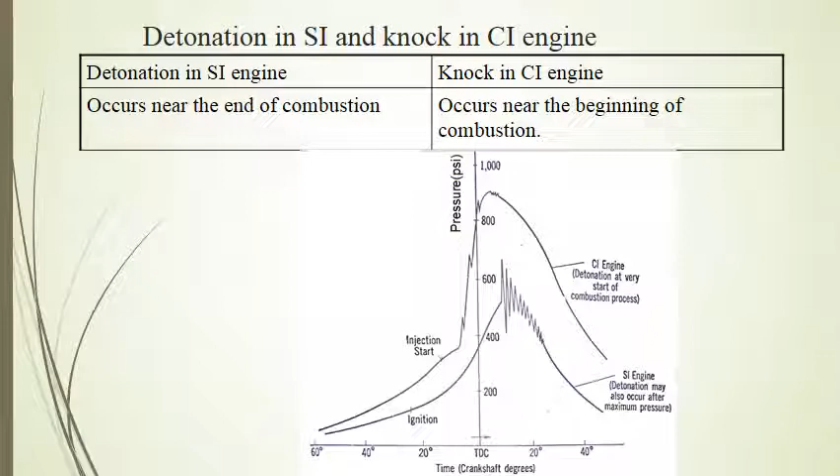So as shown in the figure shown on the slide, in the case of CI engine, detonation is occurring at the very start of the combustion process, whereas in the case of SI engine, detonation is occurring after maximum pressure.

The detonation in SI engine is of homogeneous charge, causing very high rate of pressure rise and very high maximum pressure. In the CI engine, the fuel and air are imperfectly mixed, and hence the rate of pressure rise is normally lower than that in the detonating part of the charge in the SI engine.

Moreover, as in the CI engine, the fuel is injected into the cylinder only at the end of compression stroke. There is no question of pre-ignition or premature ignition as in the SI engine.

In the SI engine, it is relatively easy to distinguish between knocking and non-knocking operation, as the human ear easily finds the distinction.

However, in the case of CI engine, the normal ignition is itself by auto ignition, and hence most CI engines have a sufficiently high rate of pressure rise per degree of crank angle to cause audible noise. When such noise becomes excessive or there is excessive vibration in the engine structure, then the engine is said to have knock.

Therefore, in the CI engine, there is no definite distinction between normal and knocking combustion. The maximum rate of pressure rise in the CI engine may reach as high as 10 bar per crank degree angle.

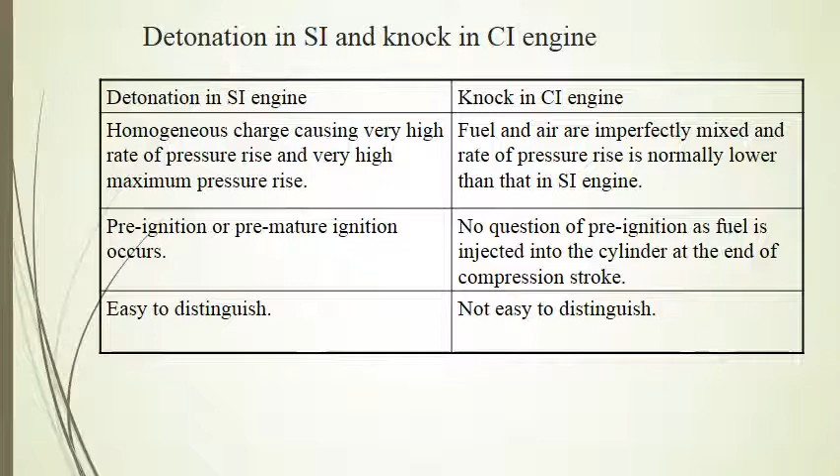Now we will compare the requirement of certain factors which tend to reduce detonation or knocking in SI and CI engine. Self-ignition temperature of the fuel required is high in the case of SI engine, whereas in the case of CI engine, self-ignition temperature required for the fuel is low.

Time lag or delay period for fuel, means ignition lag, that is required in SI engine is high, whereas the delay period in the case of CI engine, it should be short. The compression ratio should be low for SI engine, whereas it should be high for CI engine.

Inlet temperature should be low for SI engine, whereas high for CI engine. Inlet pressure should be low for SI engine, whereas high for CI engine. Combustion chamber wall temperature should be low for SI engine, whereas high for CI engine.

Speed desired for SI engine to reduce knocking should be high in SI engine, whereas low in case of CI engine. Cylinder size required to reduce detonation or knocking in SI engine is lower, whereas the cylinder size should be large for the CI engine.

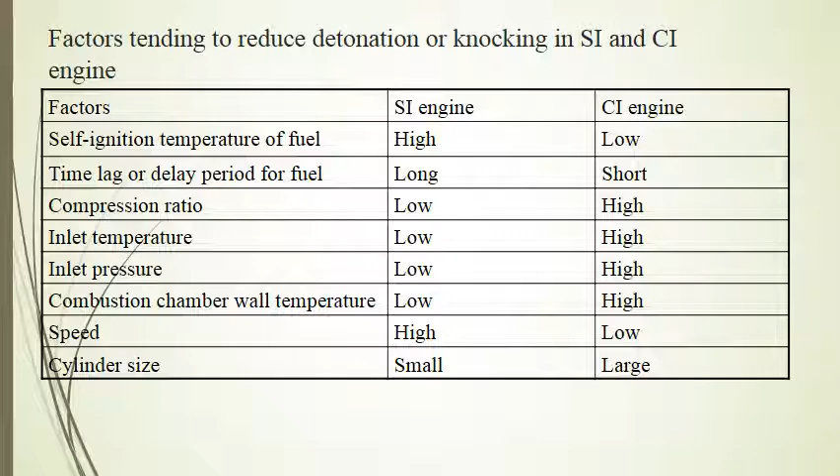Now, as far as the aspect of controlling or reducing detonation or knock is concerned, the approach adopted in the case of CI engine is just opposite to that of SI engine. The factors that tend to reduce detonation in the SI engine increase knocking in the CI engine.

The detonation or knocking in the SI engine is due to simultaneous auto-ignition of the last part of the charge. And to eliminate detonation in the SI engine, we want to prevent altogether the auto-ignition of the last part of the charge, and therefore we require a long delay period as well as high self-ignition temperature of the fuel.

Whereas if we want to eliminate knock in the CI engine, we would have to achieve auto-ignition as early as possible. So what is required? We require a short delay period and low self-ignition temperature of the fuel.

So we can say that a good CI engine fuel is a bad SI engine fuel, and a good SI engine fuel is a bad CI engine fuel.

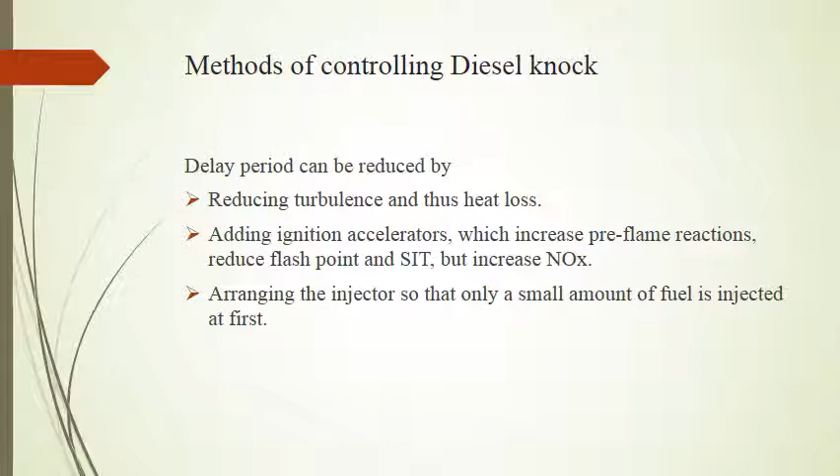As we know, in the case of SI engine, the fuel and air are mixed outside the combustion chamber, that is in the carburetor, whereas in the CI engine the mixing of fuel and air has to take place inside the combustion chamber.

This happens when the fuel is injected near the end of compression stroke during a period of say 20 to 35 degrees of the crank angle.

So we can say that the important function of CI engine combustion chamber is to provide proper mixing of fuel and air in a short time.

So what is required? An organized air movement, which we call air swirl, and this air swirl is provided to produce high relative velocity between the fuel droplets and air.

The fuel is injected into the combustion chamber by an injector having a single or multiple orifices. If a single orifice injector is used at the maximum delivery, the air movement should be so adjusted that the whole of the air in the combustion space is swept once past the fuel jet during the process of combustion.

So this involves a very high rate of air swirl. If two jets of fuel at 180 degrees apart are used, then air needs to make only half a revolution during the combustion process, and for four jets, 1/4 revolution, and so on. Thus increasing the number of jets reduces the intensity of air swirl needed.

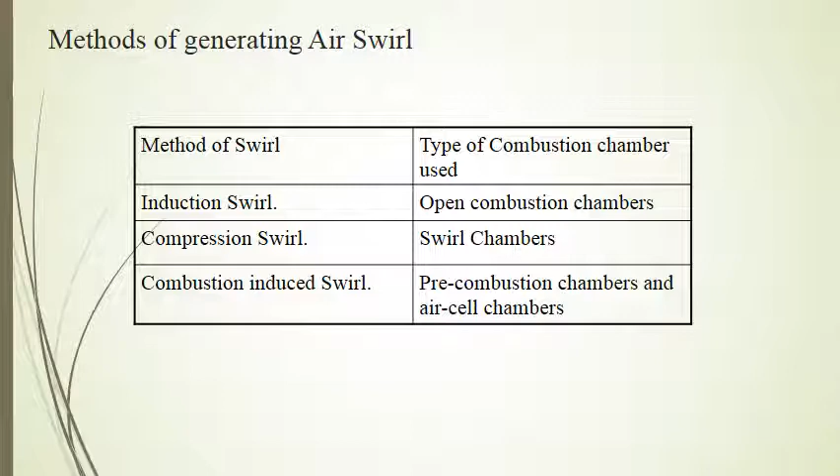In 4-stroke engines, induction swirl can be obtained by two methods: either by suitable design of intake passages or by masking or shrouding a portion of the circumference of the inlet valve. The angle of mask may vary from 90 to 140 degrees of the circumference.

However, the masking offers a disadvantage, that is, the free passage area gets restricted, so it requires some arrangement to prevent the rotation of the valve.

In the 2-stroke engine, the induction swirl is created by suitable inlet port forms. The induction swirl is usually enhanced by secondary air movement, which we call squish.

Now in the CI open combustion chamber design, the clearance between cylinder head and piston at top dead center position is as small as 1 to 1.5 mm.

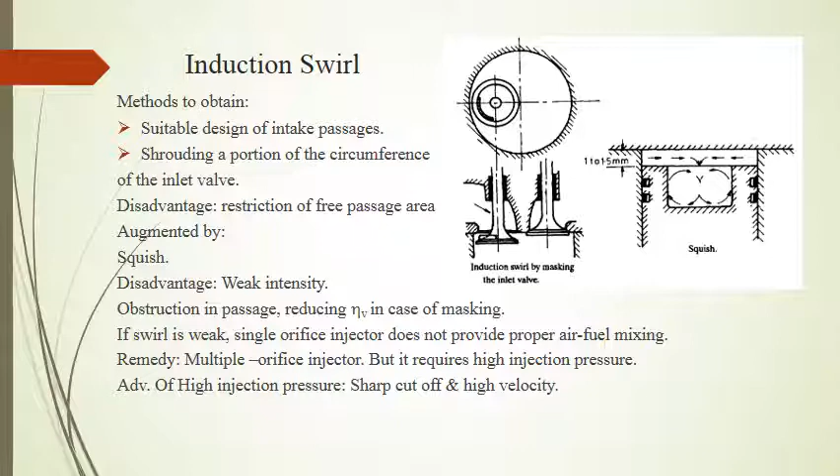An open combustion chamber is defined as one in which the combustion space is essentially a single cavity with little restriction, and hence there are no large differences in pressure between different parts of the chamber during the combustion process.

A cylindrical chamber is better from a squish point of view because the depth to diameter ratio can be varied to give any desired squish.

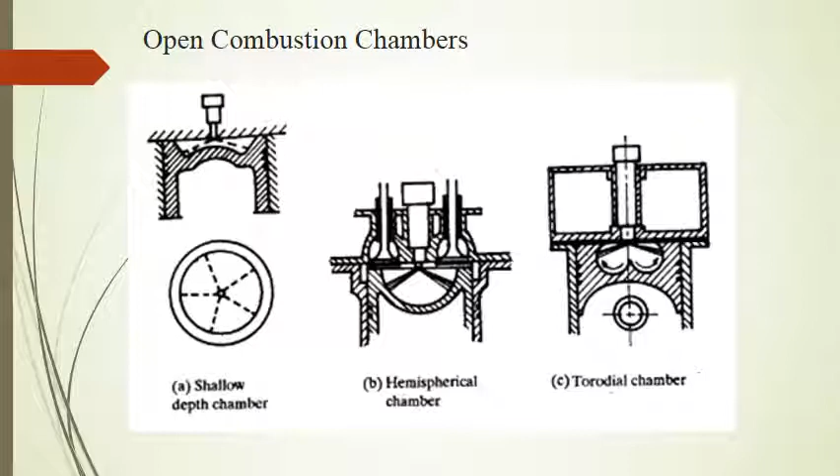The second method of generating swirl is by compression swirl, done with the help of a swirl chamber. A swirl chamber is a divided chamber. A divided combustion chamber is defined as one in which the combustion space is divided into two or more distinct compartments, between which there are restrictions or throats small enough that considerable pressure differences occur during the combustion process.

Here we have shown the swirl chamber, popularly known as Ricardo Comet Mark II. It consists of a spherical shaped swirl chamber separated from the engine cylinder, and into this chamber maximum possible air is transferred during the compression stroke. The chamber is connected to the cylinder by a throat or passage which enters the chamber in a tangential direction, so that the air flowing into the chamber is given a strong rotary movement.

This swirl is maximum at about 15° before top dead center, close to the time of injection. The fuel gets injected into the swirl chamber, and the ignition and bulk of the combustion takes place. The products of combustion pass back through the same throat passage at a still higher velocity.

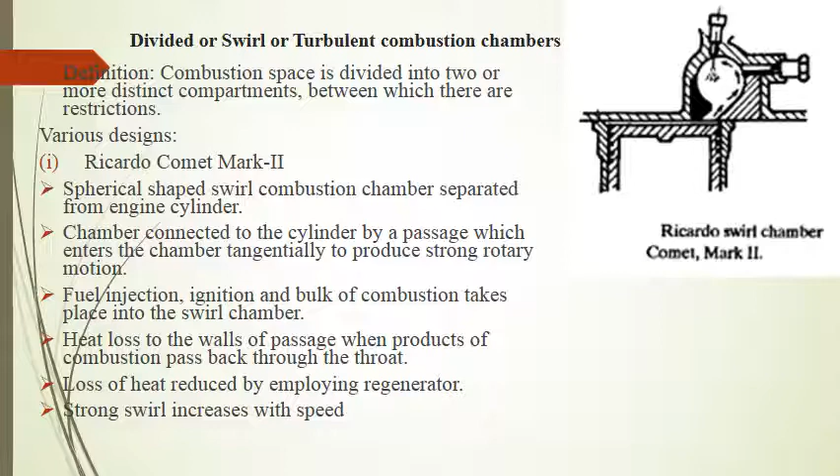The whole of the fuel is delivered into the swirl chamber, and when ignition takes place, the increase in pressure in the swirl chamber causes a rush of hot gases and partially burnt fuel outwards into the two shallow depressions.

A rotating movement is thereby set in the depressions, and the air contained in them is fed into the gases coming out of the swirl chamber, and thus helps in completing the combustion. So in this design, both compression swirl and combustion induced swirl are used.

The advantage of Mark III over Mark II is that less work is done in transferring the air from the cylinder to the swirl chamber and back, as only about half the air is transferred.

In Mark II, there is a thin layer of air between the piston and the cylinder head, which is not readily available to the fuel, but in this design, due to shallow depressions, the air in the thin layer is reduced. The air in the shallow depression is embraced by the fuel and is utilized. So this increases brake effective pressure.

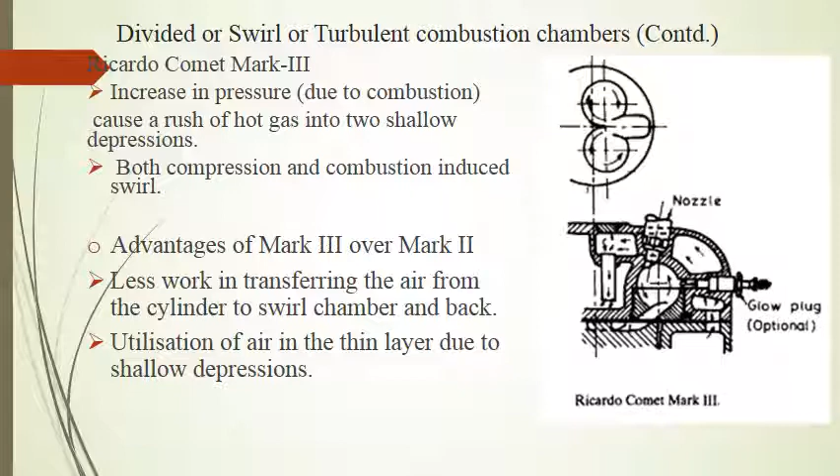The high excess air that is there in induction swirl allows lower average combustion chamber temperature. Now the lower average combustion chamber temperatures, along with low turbulence and low heat losses, permits engine indicated thermal efficiency to approach the ideal air cycle efficiency.

Now in the open combustion chamber, the intensity of swirl is low. So consequently, the heat loss to the chamber walls is also relatively low, resulting in easier cold starting.

The swirl is obtained during induction stroke, so no additional work is done in producing the swirl. Now this, coupled with high indicated thermal efficiency, means high brake thermal efficiency and therefore lower fuel consumption.

Open chamber is generally used for large low-speed engines. In low-speed engines, injection is spread through a greater period of time, and thus ignition delay is a relatively less important factor. Consequently, less costly fuels with longer ignition delay may be used. With high speeds, this type of chamber with low ignition quality fuel will tend to knock.

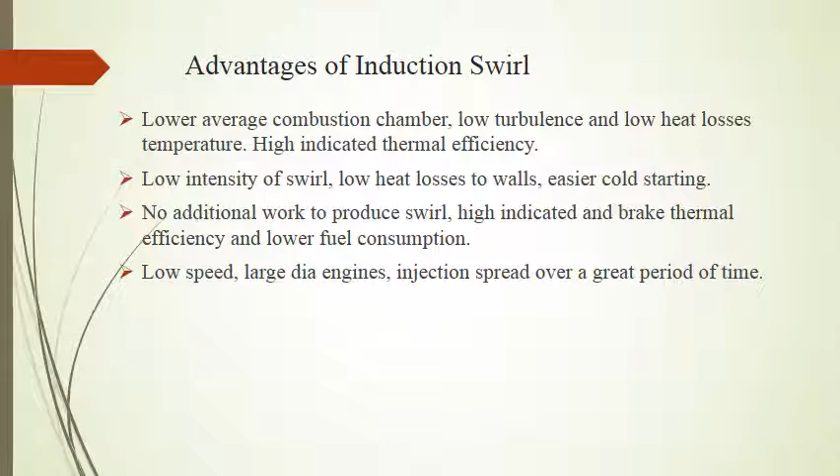As the swirl induced by induction is generally weak in intensity, multi-orifice nozzles with high injection pressure are required. The small nozzle openings are frequently clogged, or can cause change of fuel spray pattern by carbon deposits, with consequent higher maintenance cost.

Small nozzle openings influence the minimum quantity of fuel that can be delivered per injection and introduce complications at light loads and under idling conditions. The use of a masked valve lowers the volumetric efficiency.

Moreover, in the interest of symmetry, the multiple orifice injector has to be placed near the center of the cylinder and therefore between the valves. This restricts somewhat the diameter of the valves and therefore further restricts the breathing capacity, that is, volumetric efficiency.

Now weak swirl necessitates excess air, that is, low air utilization. This results in lower mean effective pressure and hence large size, and therefore they are costlier engines for a given power.

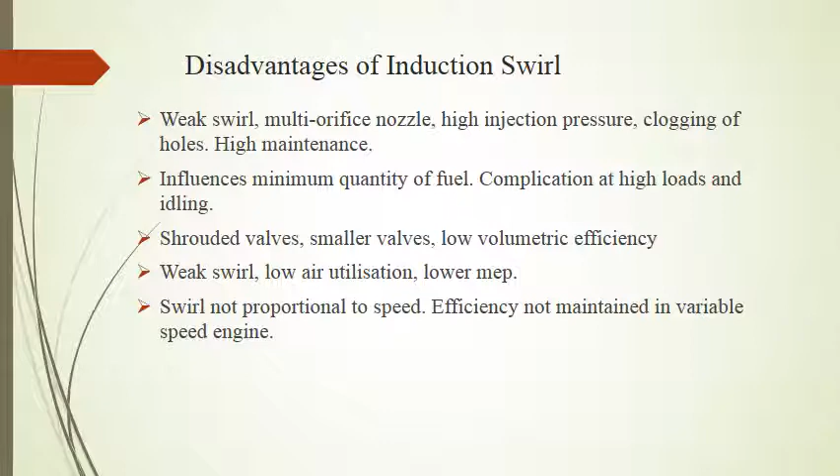Now in the case of induction swirl, one can say that it is not proportional to speed, and hence efficiency is not maintained over a wide range in a variable speed engine.

Due to strong swirl, a single orifice injector with low injection pressure is required. Low injection pressure allows the duration of the injection to be disturbed little by the length or capacity of the fuel piping or by the elasticity of fuel.

The injector is generally of Pintle type, which has self-cleaning properties. So it is less prone to clogging, and maintenance difficulties are therefore reduced to a great extent.

Due to strong swirl, there is greater utilization of air. Therefore, higher mean effective pressure is attained at the clean exhaust limit. Hence, for a given power, the size of the engine is smaller and also less expensive than that of open chamber induction swirl.

Now, in the swirl chamber design, the injector is located towards one side of the cylinder. Hence, there is freedom to use larger valves with free entry, and so volumetric efficiency and mean effective pressure can be maintained up to considerably high speeds.

Now, swirl chamber design is having one of the important advantages, that the swirl is proportional to speed. Thus, they are suitable for variable speed operation.

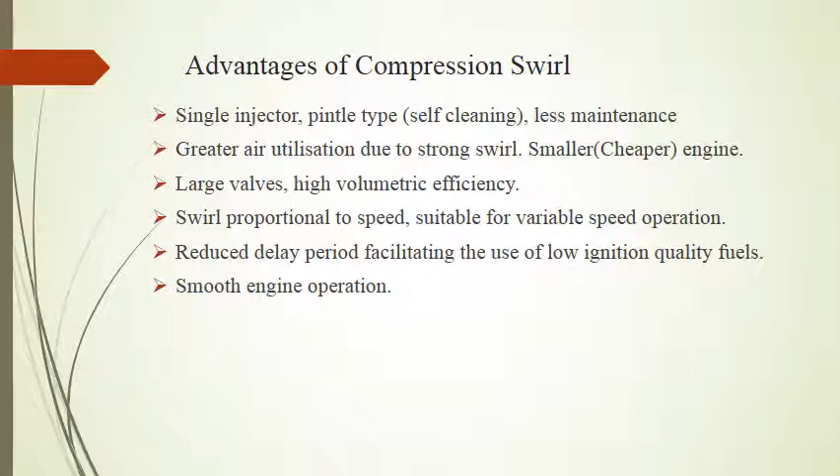Disadvantages of compression swirl: because of lower air fuel ratio, that is small amount of excess air, indicated thermal efficiency is found to be lower. Now, due to strong swirl, heat loss to the combustion chamber walls is significant.

Moreover, the swirl tends to sweep away the stagnant layer of gas near the walls of the combustion chamber, which acts as an insulator. Compression swirl is used in smaller engines with large S by V ratio, and larger the S by V ratio, more heat will be transferred to the cylinder walls. So all these factors contribute to considerable heat loss, causing trouble during starting when the engine is cold. Starting in swirl chamber engines is somewhat difficult compared to open chamber engines.

The work done during compression is significantly higher, with corresponding loss during expansion, resulting in lower mechanical efficiency. The construction of the cylinder is more expensive than in the case of open chamber. Now, the significant waste of energy in the exhaust gases leads to lower life of the exhaust valve.

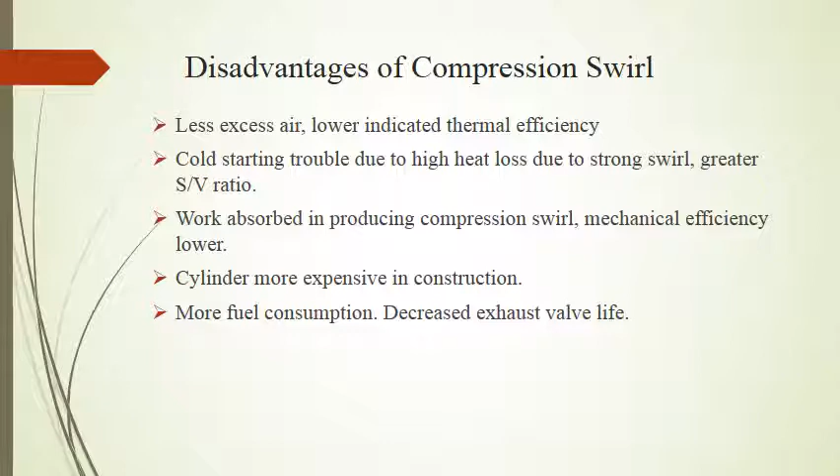The pre-combustion chamber contains 20 to 30% of the clearance volume. The fuel is injected into the pre-chamber in such a manner that the bulk of it reaches the neighborhood of the orifice separating the two chambers.

The combustion is initiated in the pre-chamber and the resulting pressure rise forces the flaming droplets, together with some air and their combustion products, to rush out at velocity through the small holes, thus creating strong secondary turbulence and distributing them throughout the air in the main combustion chamber, where the bulk of the combustion takes place. About 80% of energy is released in the main combustion chamber.

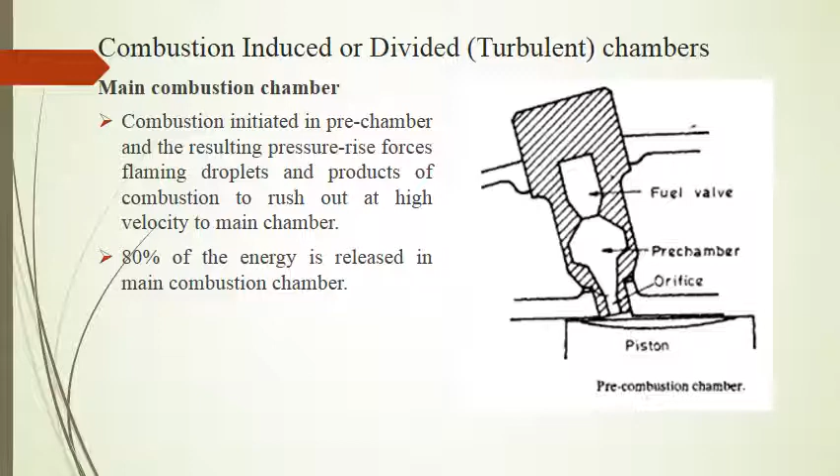Now the advantages of the pre-combustion chamber are: it uses a single hole pintle type nozzle, and the initial shock of combustion is limited to the pre-combustion chamber only. Low ignition quality fuels are required, as violent combustion is required in the pre-chamber to force burning droplets out and create secondary turbulence.

Moreover, the pre-combustion chamber has multi-fuel capability without requiring any modification in the injection system. This is because the temperature of the pre-chamber is high, around 2000 degrees Celsius, and the difference in optimum injection timing between petrol and diesel fuels is only 2 degrees, compared to 8 to 10 degrees in other designs.

Now the disadvantages of the pre-chamber are high heat losses due to high velocity, and a small size of valve due to the central location of the pre-chamber.

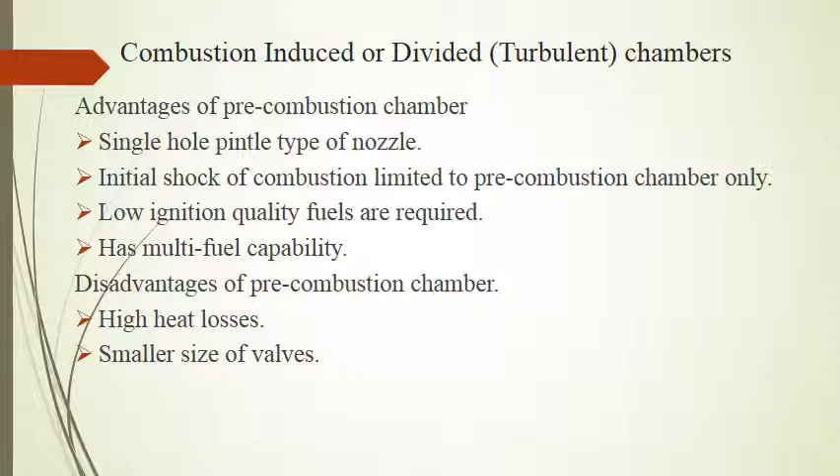This is another design of combustion chamber related to combustion induced swirl: the air cell chamber. Like the pre-combustion chamber, there is no organized air swirl in this design.

It has an air cell in two parts, major and minor, which are separated from each other and from the main chamber by narrow orifices. The air cell contains about 10 to 15% of the clearance volume. A pintle type of nozzle is located in the main combustion space, which injects fuel across this space towards the open neck of the air cell.

The process of combustion in such design is not very clear. The first ignition probably starts near the neck of the minor air cell chamber, where pressure rises sharply. This results in the outflow of air, burning gas and fuel to the main chamber, but because of the restricted passage and start of the expansion stroke, the high pressure is not transmitted to the main chamber.

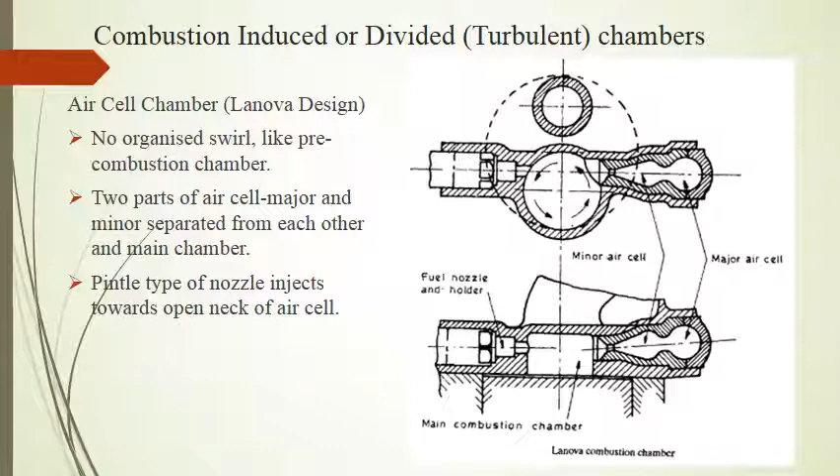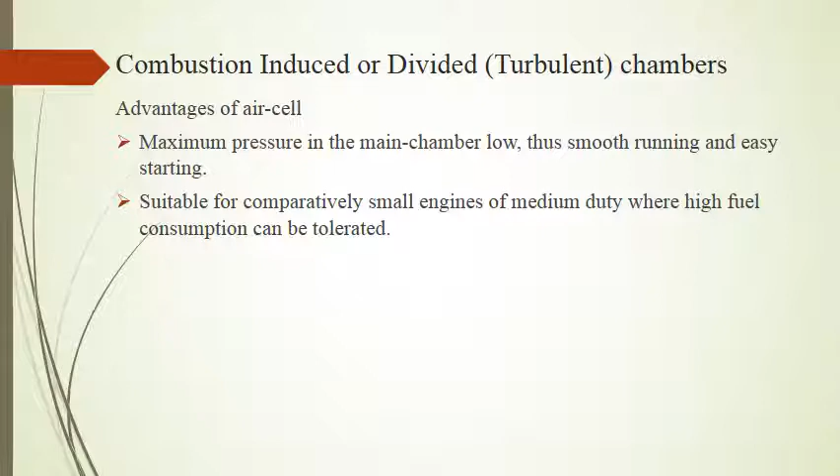The advantages of the air cell chamber design are: the maximum pressure in the main chamber is quite low, giving smooth running and easy starting. For easy starting, compression ratio may be enhanced by closing part of the air cell. This type of chamber is therefore most suitable for comparatively small engines of medium duty, where relatively high fuel consumption can be tolerated.

Each combustion chamber design has its own characteristics, features, advantages and disadvantages. Any combustion chamber that may produce good results in one application may prove futile in another application. So a combustion chamber design must be chosen according to the particular requirement.

The important factors to consider while designing CI combustion chambers: high thermal efficiency, fuel requirement, that is the ability to use less expensive fuel, as well as the ability of an engine for multi-fuel operation. Ease of starting, which implies heat loss to the combustion chamber wall should be less. Capacity for variable speed operation, smoothness of operation, and avoidance of diesel knock, that is combustion noise should be avoided.

Low exhaust emission, nozzle design, which basically refers to injection pressure maintenance problems. High volumetric efficiency, high brake mean effective pressure, which implies that engine weight per unit power should be less.

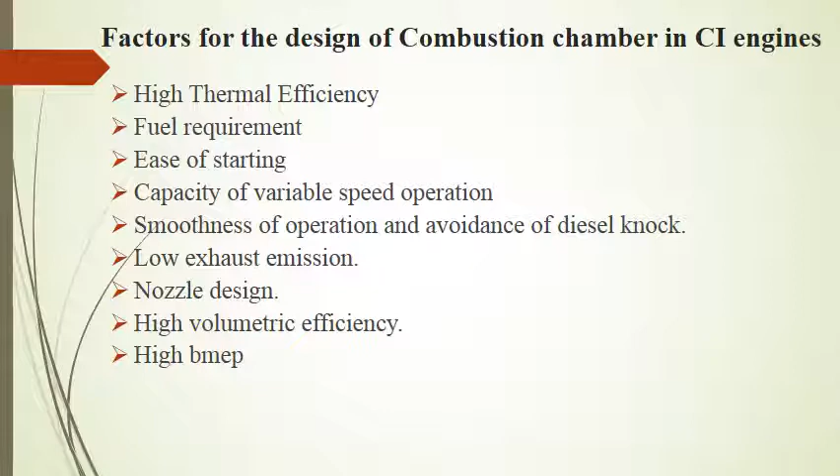Cold starting of CI engine has been a problem, and ease of starting in cold is an important requirement for CI engine design. To ensure easy cold starting, frequently compression ratios higher than necessary are used. But even then, cold starting may become difficult in extreme cold climates, or when the cylinder liner is heavily worn, or when the valves are leaky. It is therefore sometimes necessary to provide some electric aid for cold starting.

We know that for ignition in CI engine we depend on high temperature and pressure of the compressed air. For combustion to take place in the short time available, the temperature must be high enough to exceed the self-ignition temperature of the fuel by a sufficient margin. High pressures ensure intimacy of contact between fuel particles and air particles, and therefore rapid transfer of heat from the air to the surface of the liquid fuel.

At very low speeds, the engine will not start because of high heat losses to the cold walls of the cylinder during compression, and greater time available for leakage past the piston rings. The engine may also not cold start at too high a speed, because of too short a time available for vaporization and chemical preparation of the mixture for ignition.

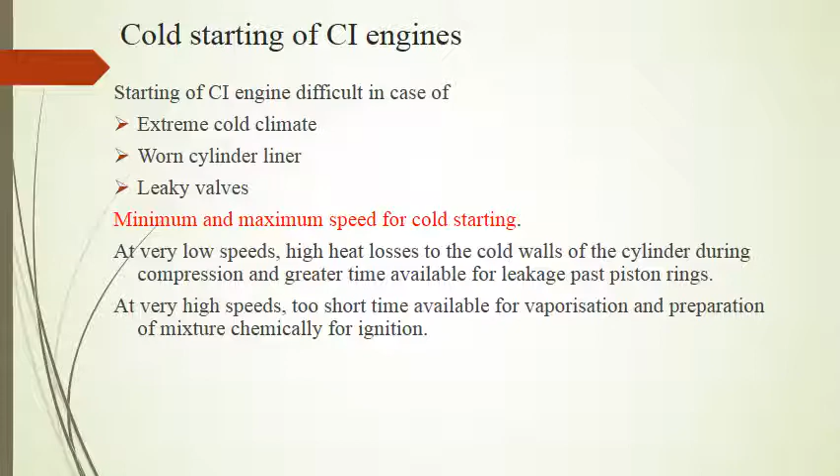The optimum speed for cold starting depends on the surface-to-volume ratio, which controls heat loss to the cylinder walls, and also on the intensity of air swirl—higher swirl makes cold starting difficult due to removal of stagnant gas sticking to the combustion chamber walls and acting as an insulator. The speed for cold starting also depends on the physical condition of the engine, meaning leakage past the piston and valves, which reduces the temperature and pressure of the compressed air.

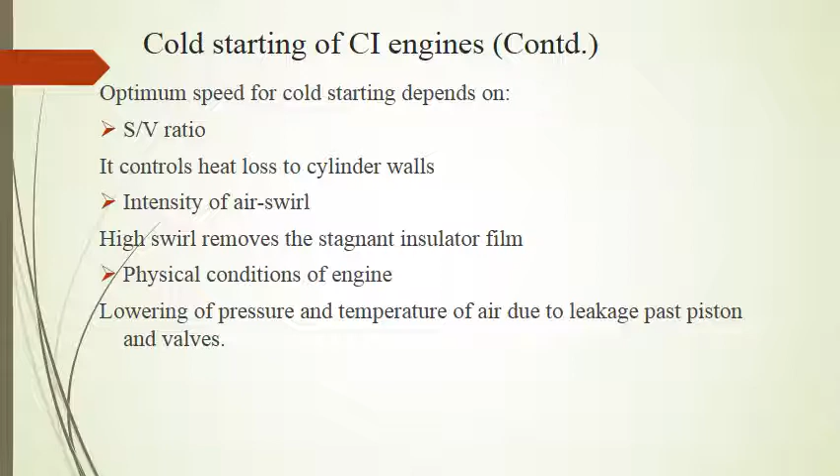The requirements, or challenges, for cold starting include greater air utilization, smooth running, and less smoke and air pollution. So what is required is a compromise in the design and operation of the engine. For example, easy cold starting can be achieved by directing a finely atomized fuel jet against the air movement, but for normal operation this would cause rough running. Again, provision of excess fuel at starting would help cold starting, but would cause excess smoke and air pollution.

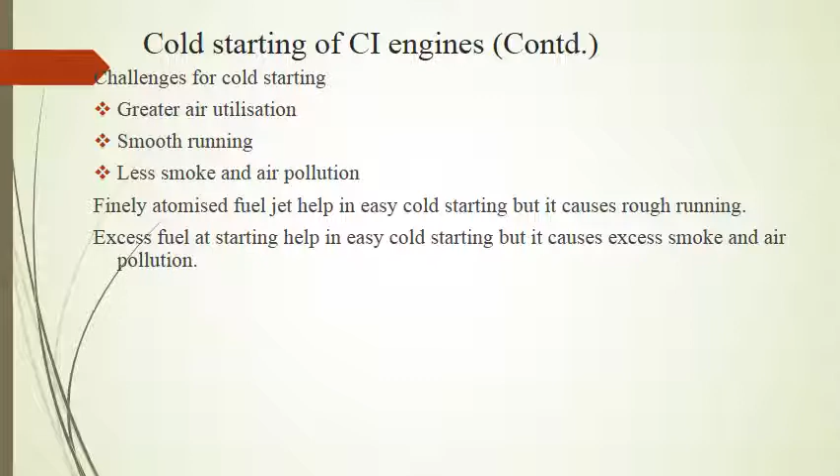These are some of the cold starting aids that have been used in the past. Injection of a small quantity of lubricating oil or fuel oil—this helps by raising the compression ratio temporarily and sealing the piston rings and valves. Provision of cartridges, which may be self-igniting or require lighting before insertion into the combustion chamber.

Starting as petrol engines: the engine can be provided with a sparking plug and carburetor. At starting, a lower compression ratio is produced by providing an auxiliary chamber, and the engine is started as a petrol engine. Other methods include preheating the engine cylinder by warm water, and modifying valve timings for starting.

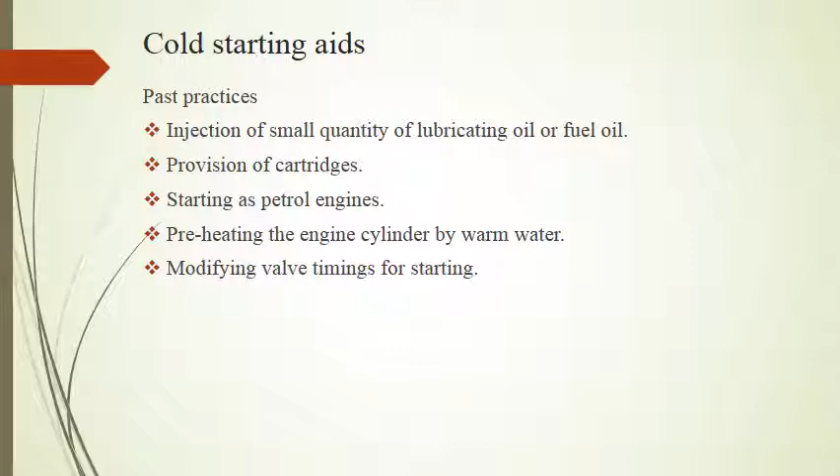Now we will discuss the modern starting aids of high-speed engines: electric glow plugs, manifold heaters, and injection of ether. Electric glow plugs are very common with swirl type combustion chambers. The electric glow plug initiates combustion by acting as a localized igniter. The advantages of the electric glow plug are simplicity and reliable operation.

Manifold heaters fed with fuel are widely used for starting. This consists of a small electric incandescent heater rated at about 150 watts, installed in the manifold. A small amount of fuel is fed onto it. The ingoing air passing the heater picks up heat as well as partially burnt products of combustion. Combustion is aided by the heat of the air as well as the chemical reactivity of the partial products of combustion. Manifold heaters are commonly used for direct injection engines, where heater plugs cannot be fitted in the combustion chamber.

Injection of ether: this method is based on the unique properties of ether. Ether has a low self-ignition temperature and a wide range of mixture strength. Therefore, injection of a small quantity of externally carbureted mixture would fire a diesel even at low ambient temperature or at low cranking speed.

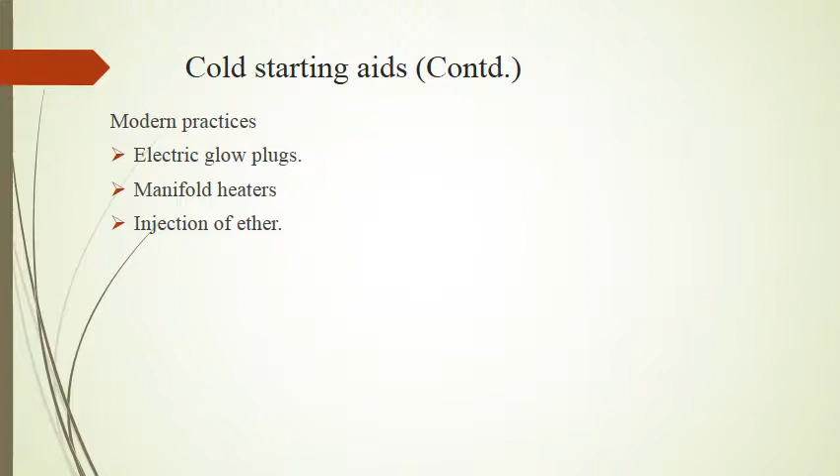So this was all about diesel knock and the design of combustion chambers for CI engines.